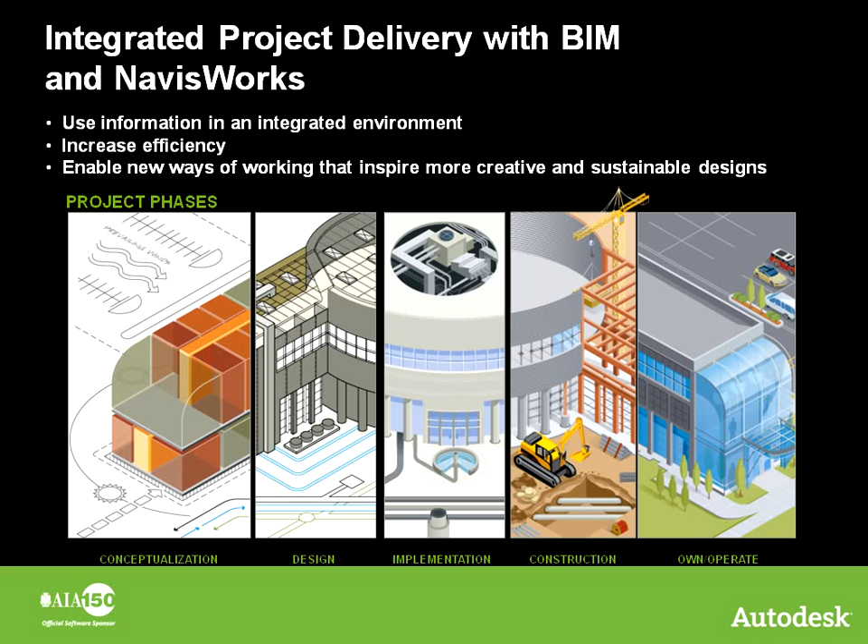What we have now is an integrated project delivery system with BIM and Navisworks. We use the information in an integrated environment, which increases our efficiency and enables new ways of working that inspires more creative and sustainable designs. So we can work on a project at any time in the project. We can create Navisworks models.

Some of the features of Navisworks include a real 3D real-time engine, so we're working as we're moving around the model in real time. We have file format compatibility, which is beyond what other BIM programs can sustain. Review file output is capable, and it's easy for all to use in Navisworks, which is really satisfying a need in the marketplace right now for an easy-to-use viewing tool of multiple softwares.

Navisworks has been around for a while now. It formerly was called Jetstream over in Europe and the UK. Autodesk purchased Navisworks and took the 6 modules that made up Jetstream. It was module based, and they put it into one package called Manage.

Manage allows you to view multiple file formats, publish, present, timeline, and use clash detection. A lower level of those that don't need that much power, we have Simulate, which includes Roamer and Timeliner. And then finally, for those even further down the chain that really only need to look around at 3D models, we've got Navisworks Review, which just has the ability to move around in Navisworks.

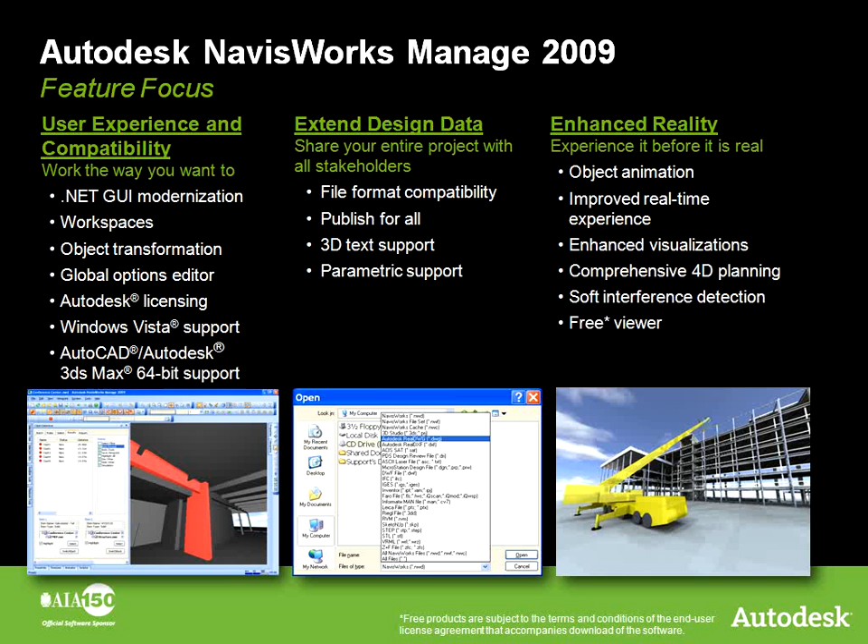We also focused on extending design data and enhanced realities. Here's a list of a few file formats more commonly used in the design industry. You see Navisworks and AutoCAD, MicroStation, a few others listed there. Those are the more common file formats that can be brought into Navisworks and read natively. There's actually a whole other list that's going to pop up in just a second that has more software titles. There's currently over 40 software applications that Autodesk Navisworks can read. And there you see a couple project scheduling, RVM, a number of different formats out there. For those on 64-bit systems, we have 64-bit compatibility in the software.

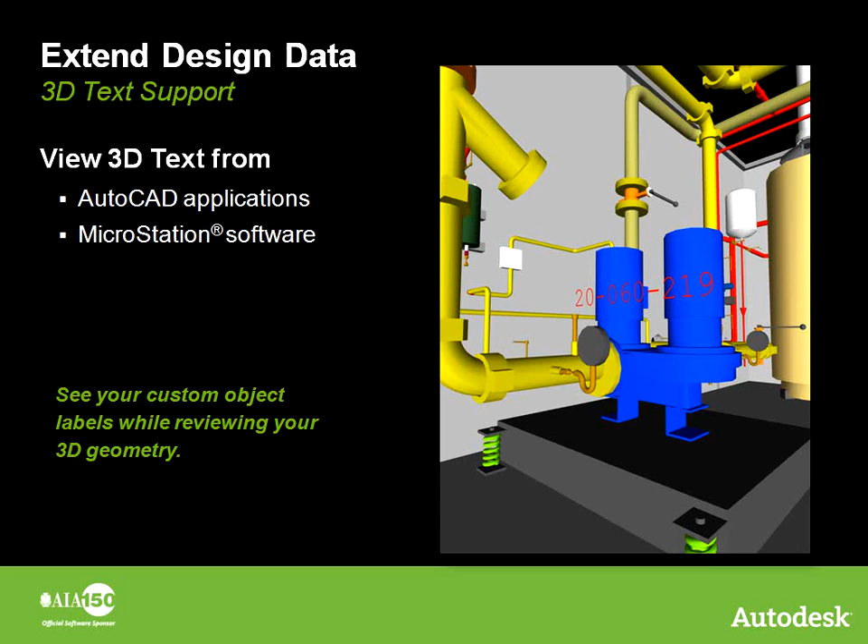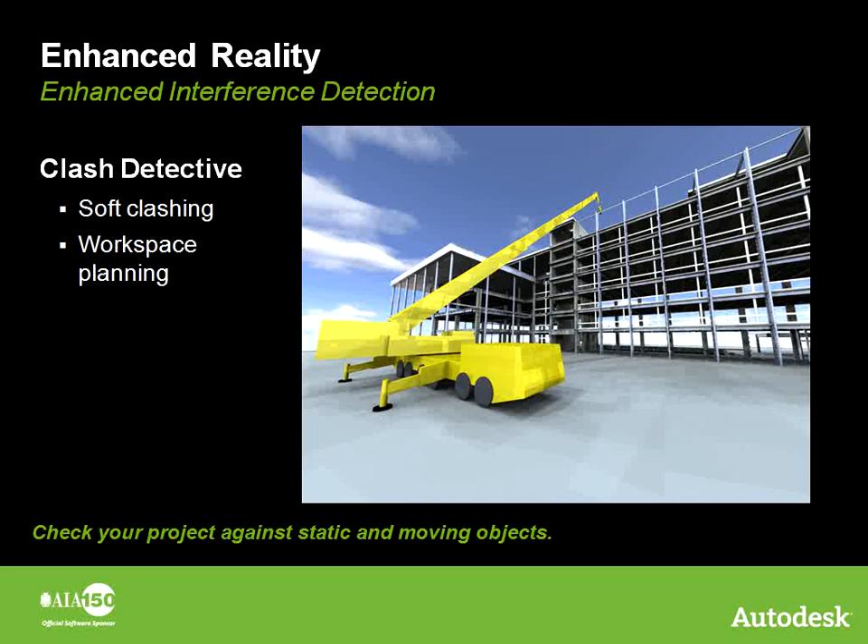Another feature focus was being able to put in 3D text. So if you have text from AutoCAD applications or MicroStation, that can be viewed inside of Navisworks. Also focused on enhanced reality, being able to soft detect or check for clashing on a site. Workspace planning, as you see here, we've got a crane making sure we've got the room.

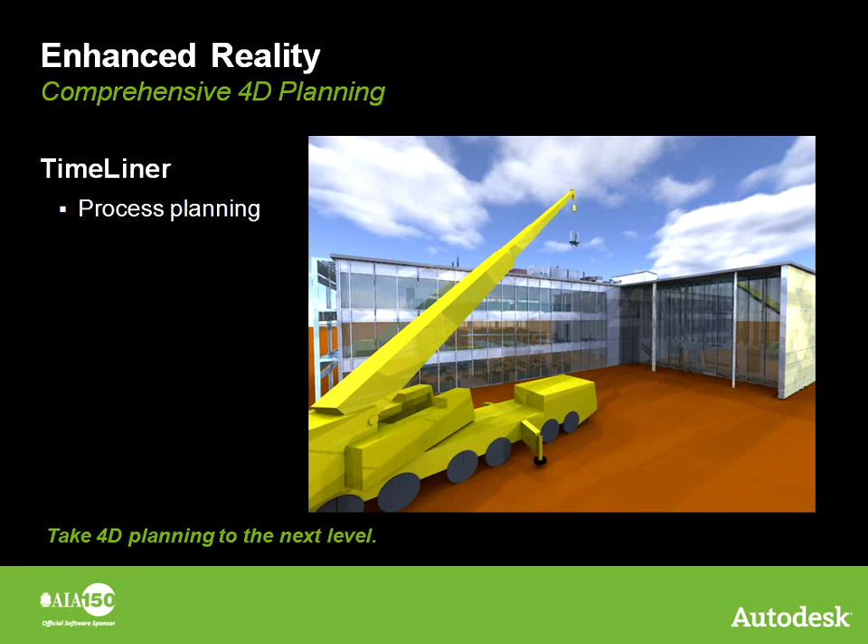Timeliner, a process planning tool, actually adds 4D capability to Navisworks. By scheduling with Microsoft Project or Primavera, we can actually bring that data in and schedule it with objects in our model. Presenter allows us to animate objects. We are bringing in real 3D objects into Navisworks, and here we can create AVI movies and animate specific objects that we want to view.

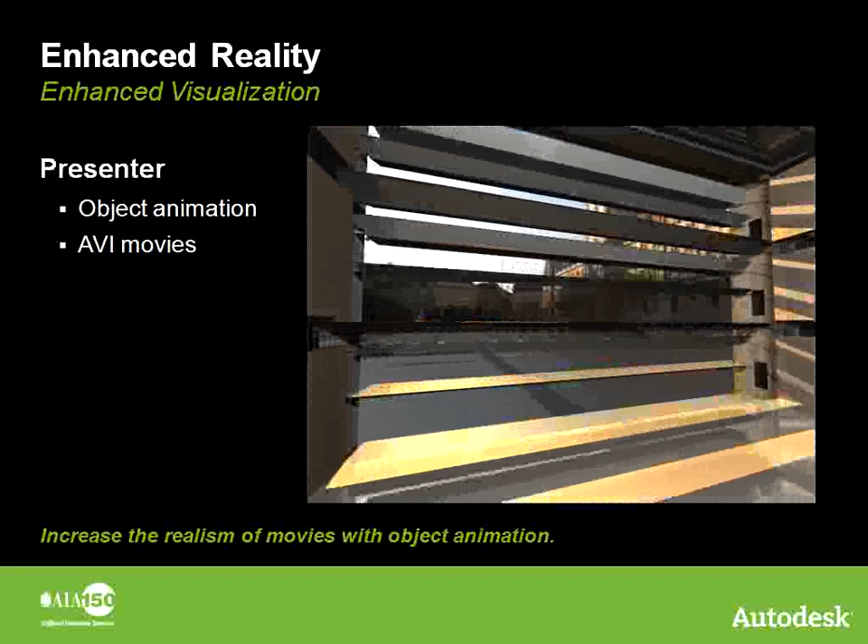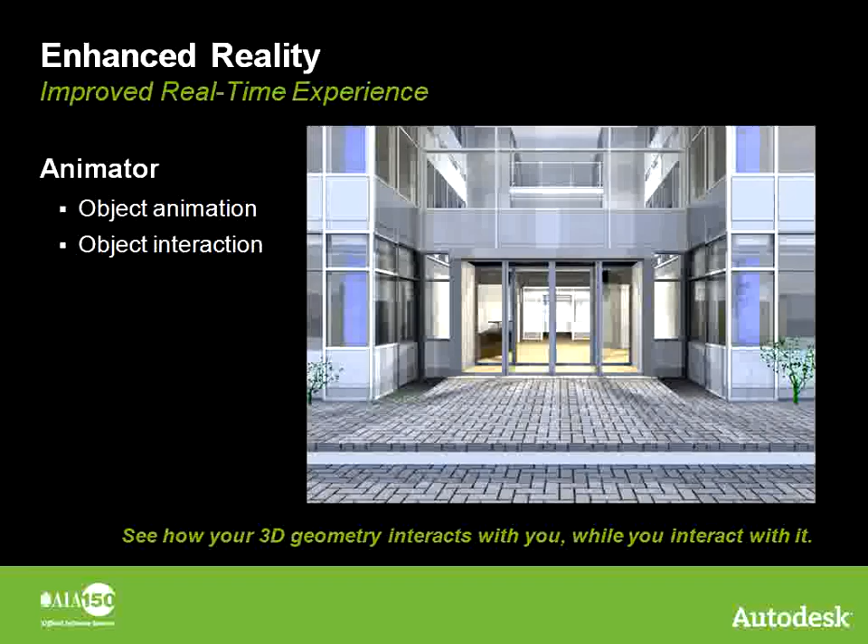Another portion of animation, being able to have things react when we're walking through a building. We can interact with the objects on screen. As we move closer, the doors open. As we move away and turn around, the doors shut as we move through. So it adds that extra realism to our models.

Autodesk also has Navisworks Freedom. Freedom's a free Navisworks and 3D DWF review tool that allows us to play back animations and view specific pieces of the model from Navisworks. This is a free viewer. You can download it right from Autodesk.com.

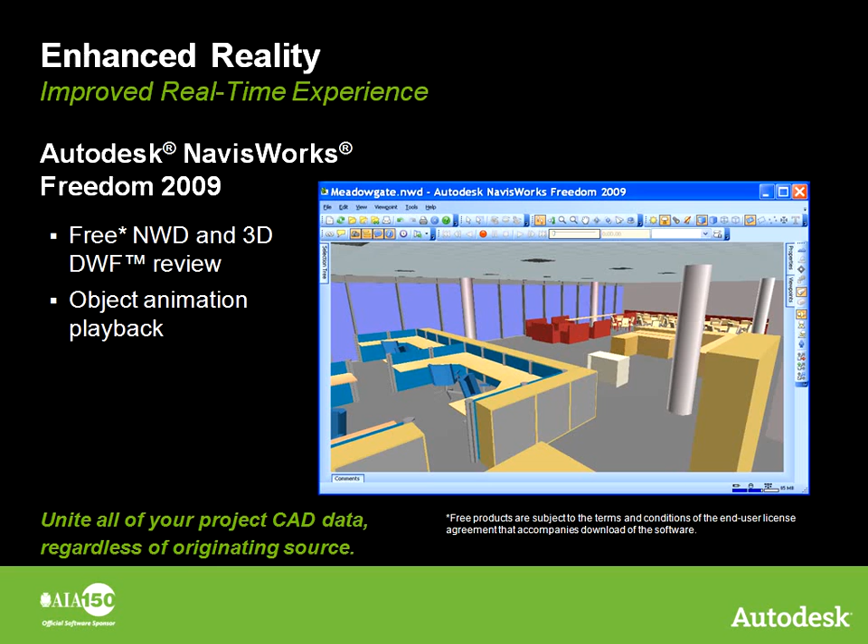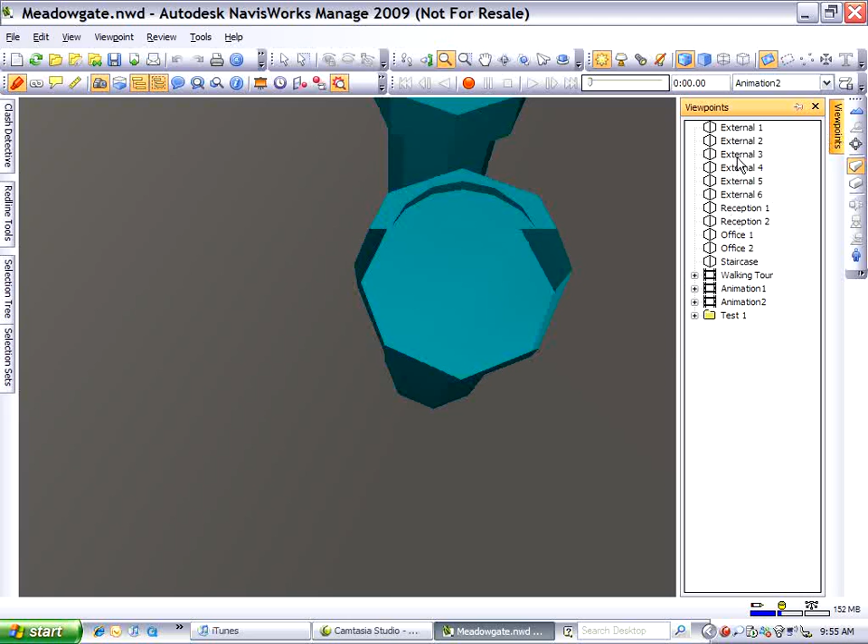Now we're going to take a look at Navisworks in more of a live setting. Here I'm going to start by opening up a couple of files. We're going to start by opening up the Meadowgate project, which is pretty much made up of a number of different pieces of the building.

We have a structure that is done in MicroStation. We have the site plan, which is done in 3D DWF and 3D Studio Max. We have the architecture done in AutoCAD, and we've got the furniture inside done in Max as well. So a number of different file formats are being used here in the drawing.

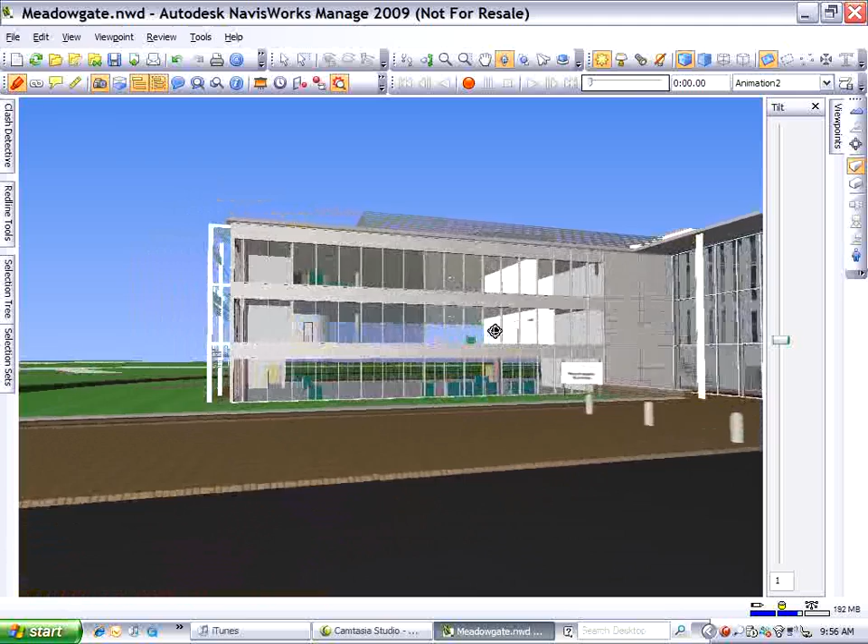We have some really simple navigation tools right up here at the top for moving and navigating around these 3D models. Here I'm using an orbit tool to spin around the model. Any direction that I push or pull moves the model around, allowing me to view it 360 degrees. There are other tools for zooming, so I can create little zoom windows or use a real-time forward and backwards approach to zoom in and out of my models.

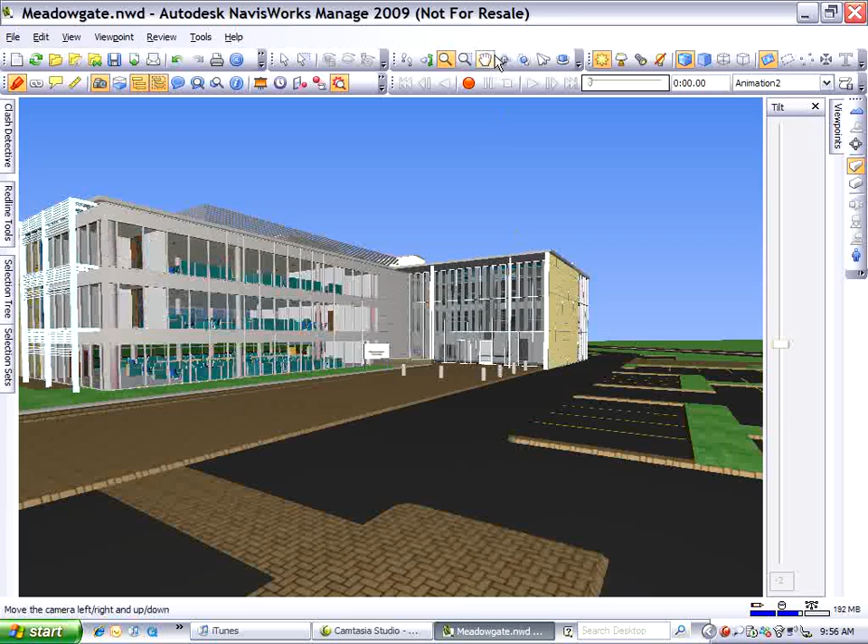Now I'm using a panning tool, so I can pan around the model at the same time, again showing how easy it is to go above or below a 3D model inside of Autodesk.

Viewpoints also give me the option of saving different spots when I find a certain piece of the model I want to view again. I'm going to pin this open and create a very simple animation.

I'm going to start by setting up just saving snapshots or views of the drawing. Here I'm saving a shot of the end of the sidewalk near my project. I'm going to give this a name, and then use the zoom tools and zoom in where I want to finish my model, ending up pretty close into my building.

Navisworks will allow me to interpolate, based on these two snapshots, how the camera is going to get from point A to point B. I don't have to do all the math, I don't have to move the camera myself. Navisworks does that work for me.

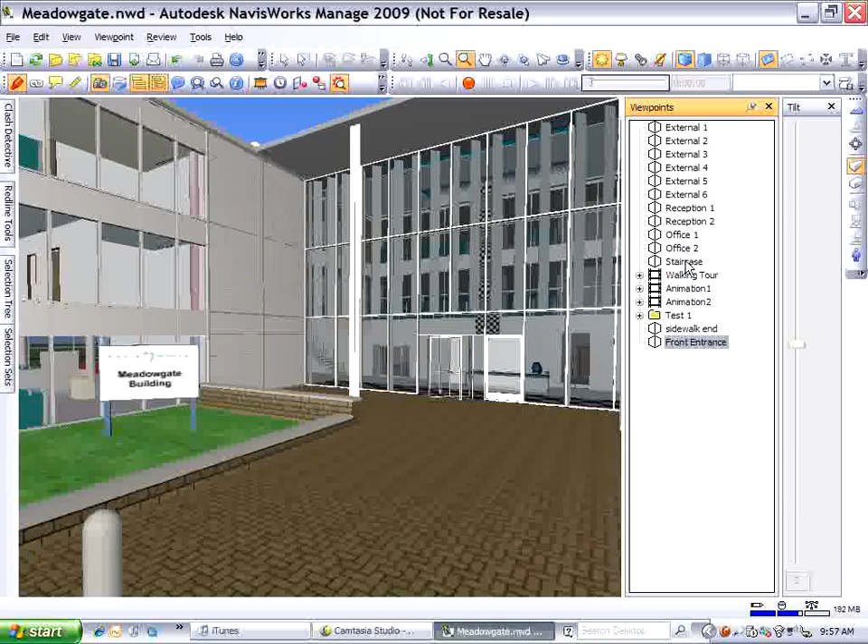So I've got a couple of others, as you can see here, saved. Here's a couple of office views, a lobby view, a couple of exterior views. These are all just single set shots.

But I can take any number of set shots and make an animation. So here I'm just going to right mouse click, and drag and drop these two views, or snapshots if you will, into this animation. So now I've got an animation.

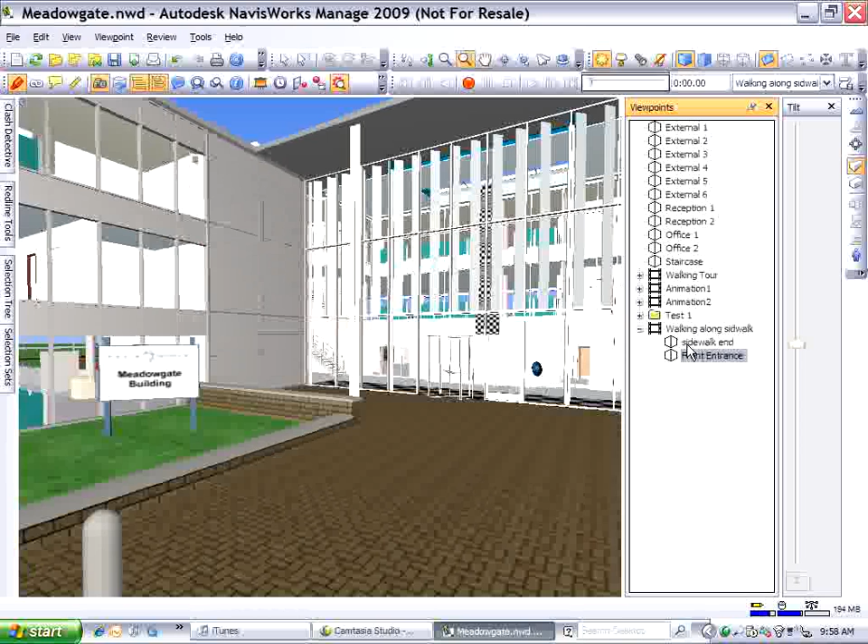I'm going to go ahead and rename this 'walking along the sidewalk,' and drag these two views in. Then, using the controls at the top of the screen, I'm going to simply hit the play button.

Although I should first check, before I hit play, how long my animation is going to be. In this case, I'll go ahead and let it play. And that's going a bit slow.

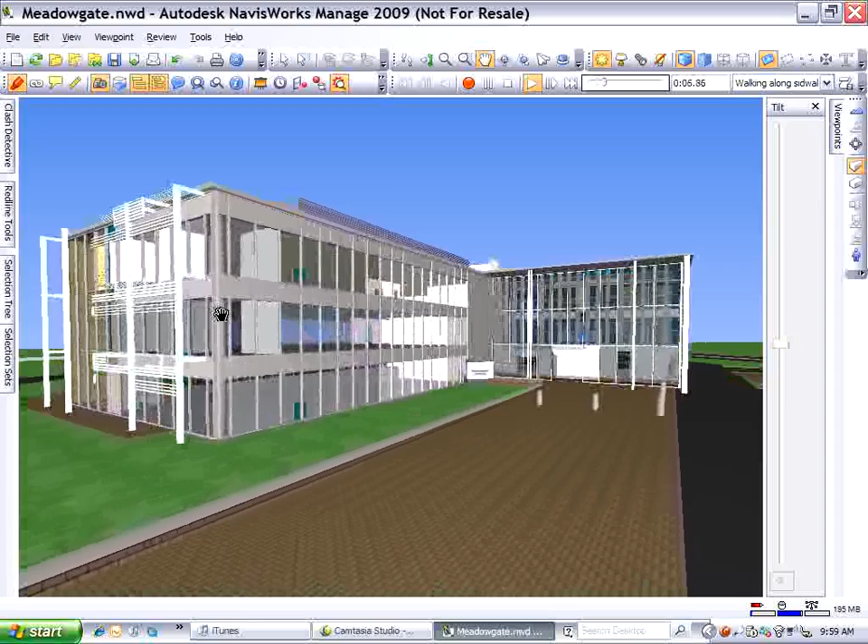Don't want to bore people when we're creating these animations, so I'm going to go in and adjust this. I'll right click on the animation, click on edit, and yep, I've got about a 34-second video. I'm going to drop this down to about 15 seconds and then hit play.

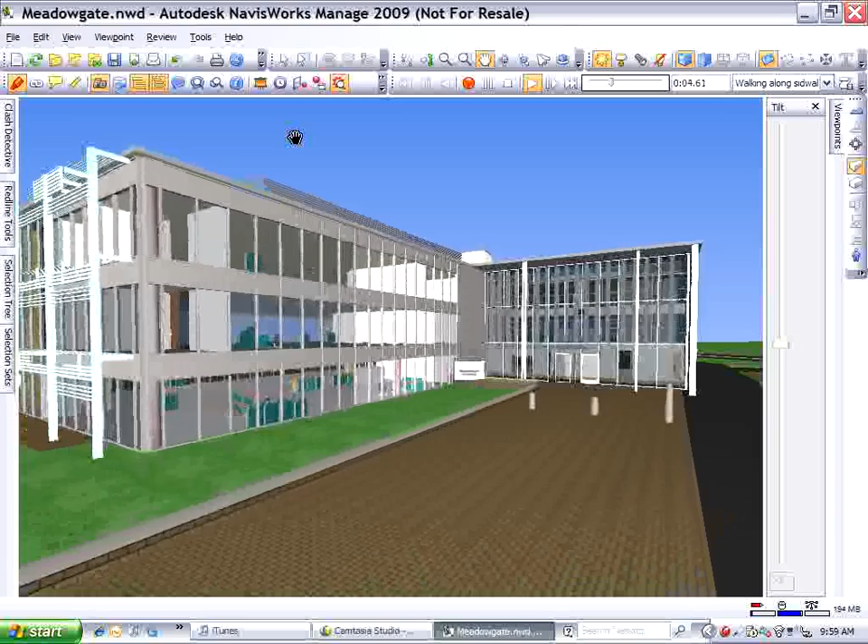So now I'm moving a little bit quicker, a little faster, probably a little more realistic if I was walking along this path. And I've got my finished animation.

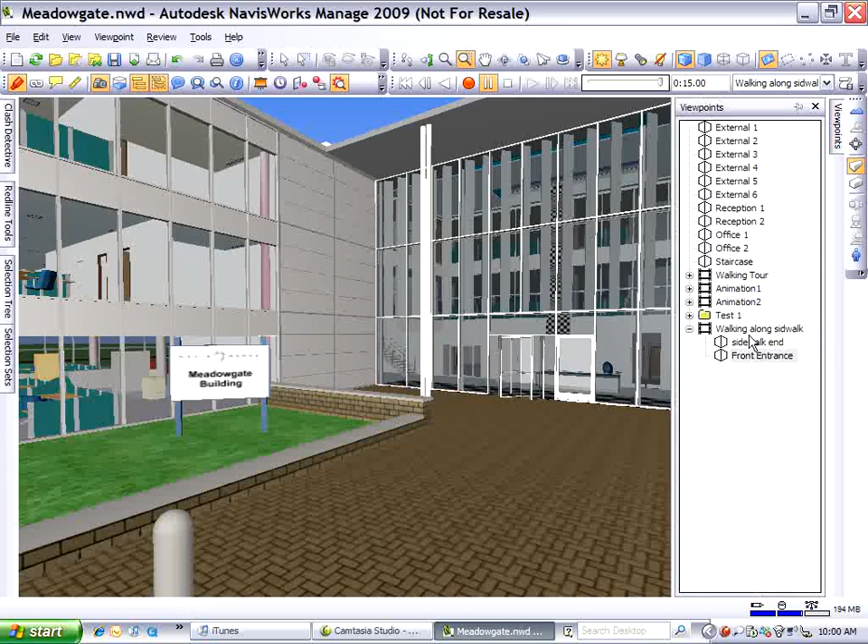Now we can also create animations on the fly. If I wanted to create a different animation, I can start with a different camera view angle, whichever the angle may be.

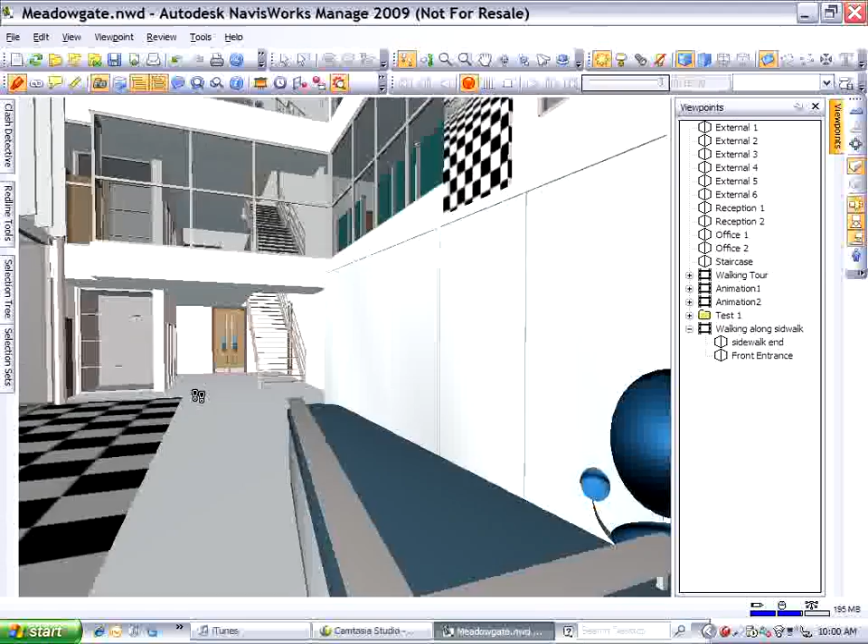We'll go from the reception booth here, and I'm just going to hit the record button at the top of the screen. The record button then allows me to use some simple animation walkthrough tools on the right side of my screen. I'm going to turn on the walk button, and then turn on gravity. Gravity will allow me to simply move to the ground and move around my model. Now as I'm moving through, I'm just pushing the mouse forward or backwards to slow it down. The faster I push forward, as you saw there by the reception desk, the faster I will move.

Here I'm going to pause just a moment and cut through the office and end up out by the main office area of this building. Again, just kind of pushing my mouse forward to get to the location where I want. When I'm done, I hit finish. My viewpoint palette will allow me then to see that animation.

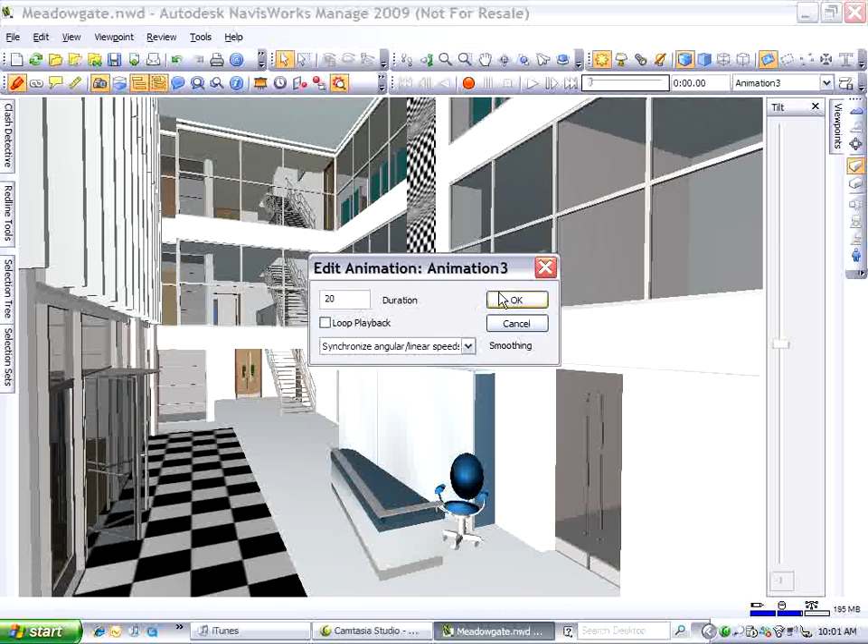Again, right click, and I'm going to edit my animation. Slow that down a little bit. Yeah, I got 45, almost 45 seconds, so we're going to change it to 20. And we'll hit play again.

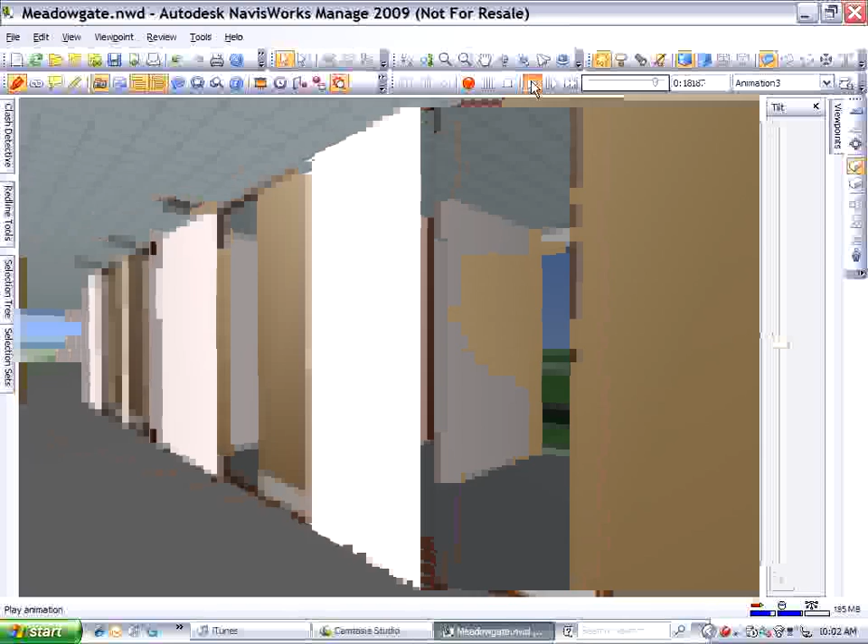And you can see it actually drop down a little quicker, still moving a little bit quicker. We might want to lengthen that or cut that up into different pieces as we're animating the building and jockeying around. Because again, the point isn't to—the point is to show off the modeling capabilities inside of here.

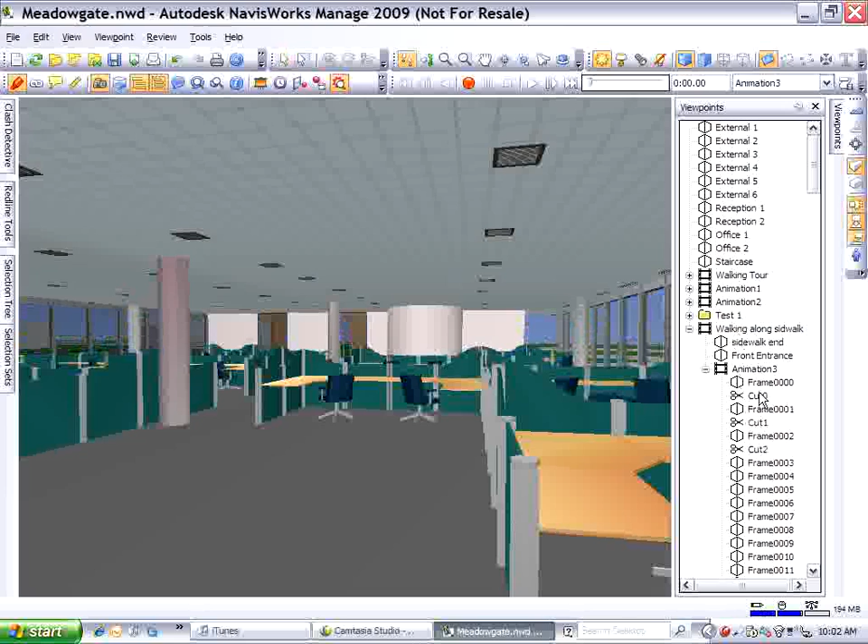Now I'm going to take that animation I just created manually, and I'm going to go ahead and edit this again, change it to 30 seconds, try to find that nice, slow, meandering type path. I'm going to take that animation and drop it inside of the other animation that I just created. So I have the outside of the building, and then I've created one inside moving up to the first floor from the ground floor. And I'll go ahead and play this animation.

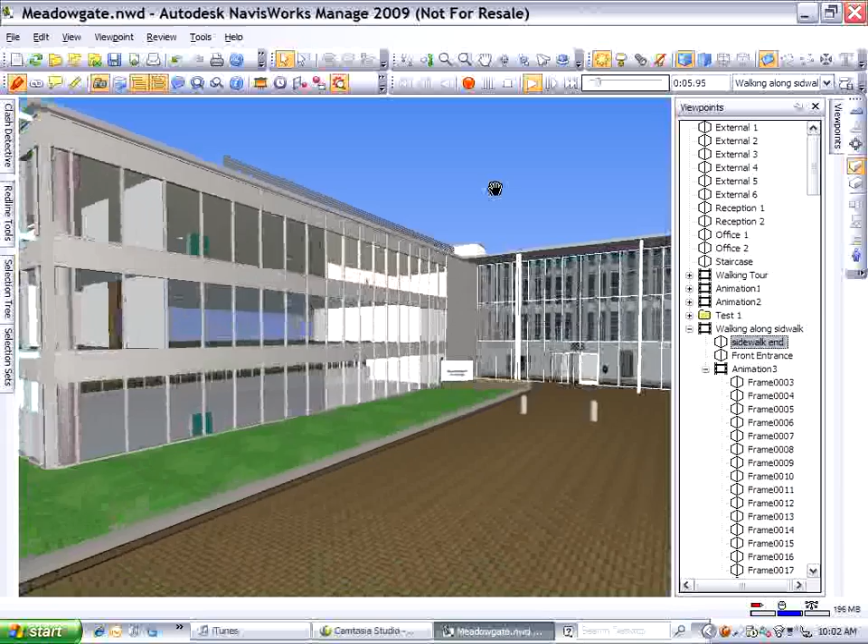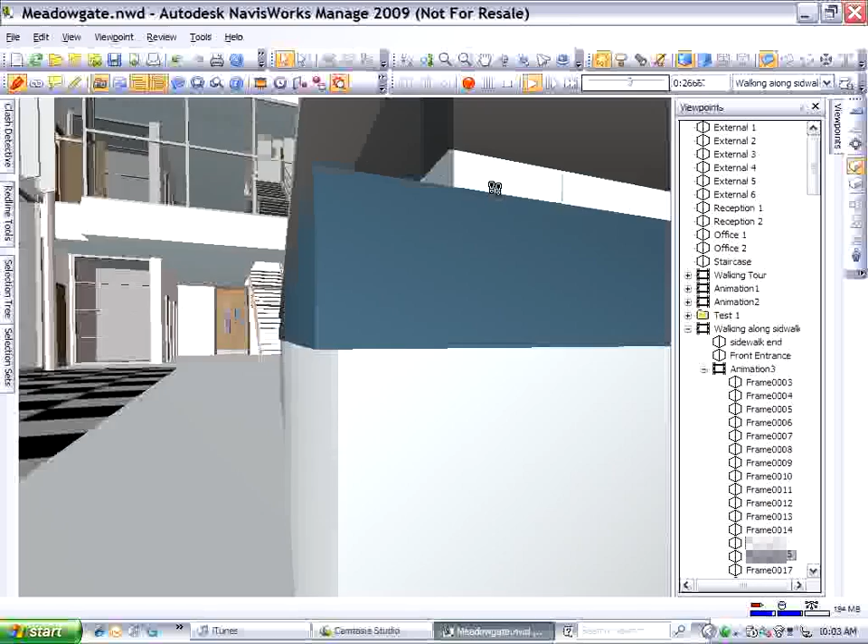So here you can see the animation that was created with just viewpoints, just a couple of image snapshots or pictures. Once it gets into my building, or near the building, then it's going to switch over, and you can actually see the viewpoints on the side of where frame we're on and where we're at. Now it's cutting through the building, running into the reception area, and now it's going through all of the scenes that it needs to go up the stairs, pausing inside of the building.

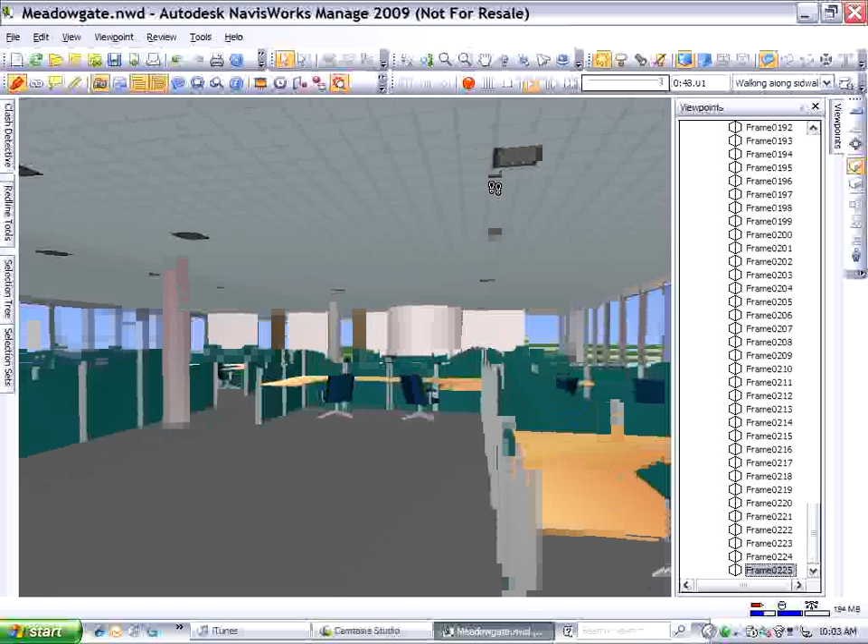There's also tools in here called collision, which allow you to bump into things but not run through them. So with the reception desk, we did not run through the reception desk. We actually bounced right off of the reception desk. So there's tools like that as well, or you can turn them off and allow yourselves to go in.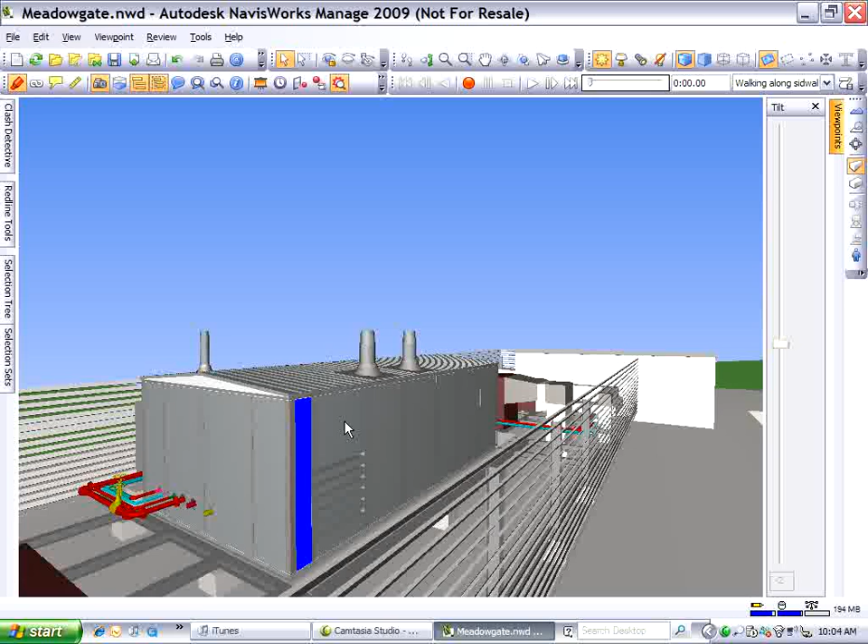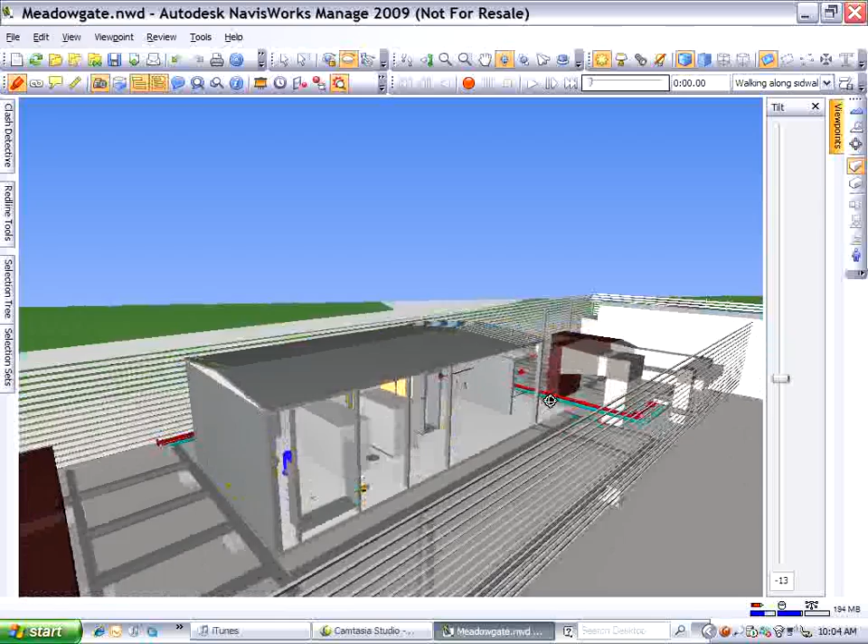I'm going to grab some items in here, and I'm just going to right-click and hide these things so I can look through my building. So now I've turned them off, I can see inside of my mechanical room. And again, I'm going to adjust this to get the best view possible of the inner workings of the mechanical system on this roof.

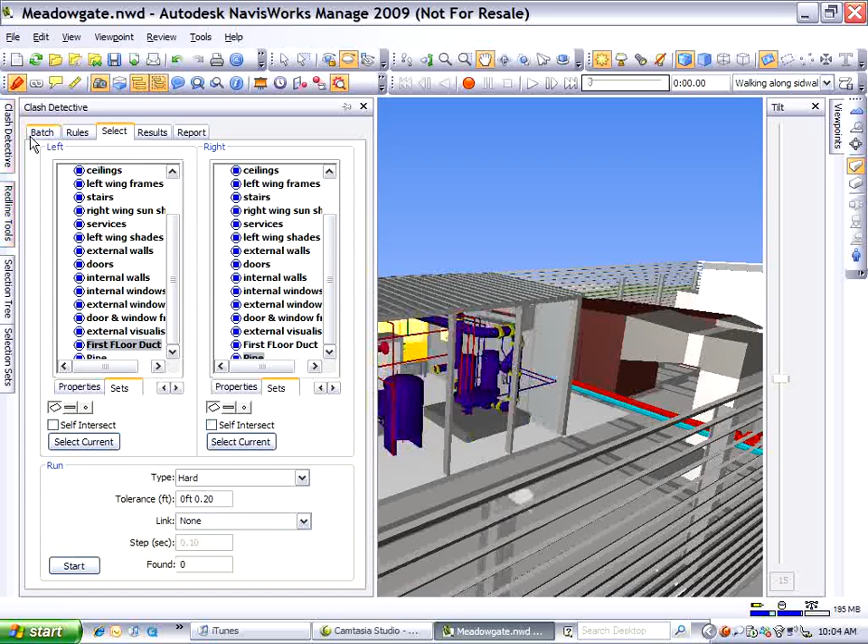I'm going to open up a palette called Redline. Redline allows me to add notes, add color, add line work, add various pieces to my model, and save these, and collaborate with others on the project team.

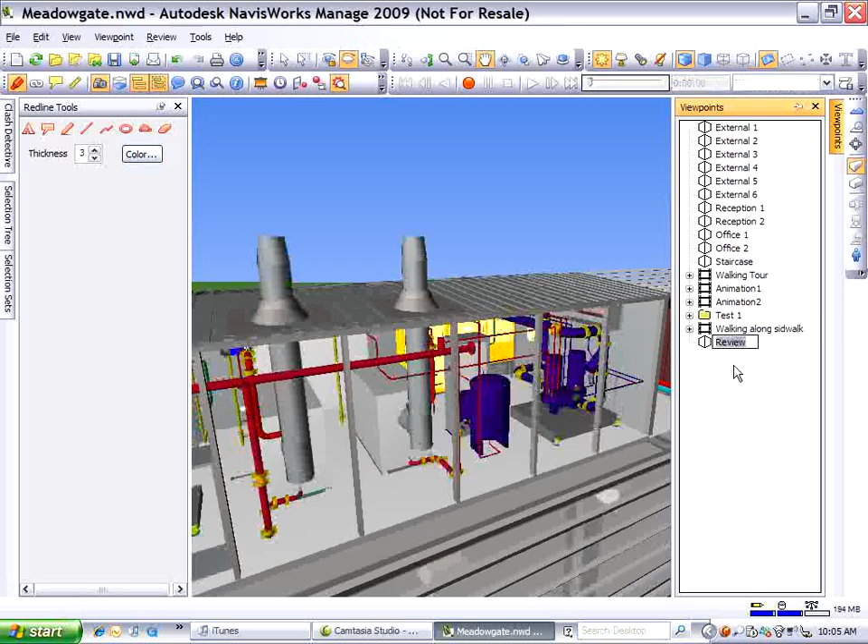Here I'm going to draw with some simple tools. I'll draw a circle around the object I want to reference for my MEP guys, and then save this snapshot. I can quickly save it out as a JPEG image and send it off to the MEP guys with the corrections or items I want to clarify.

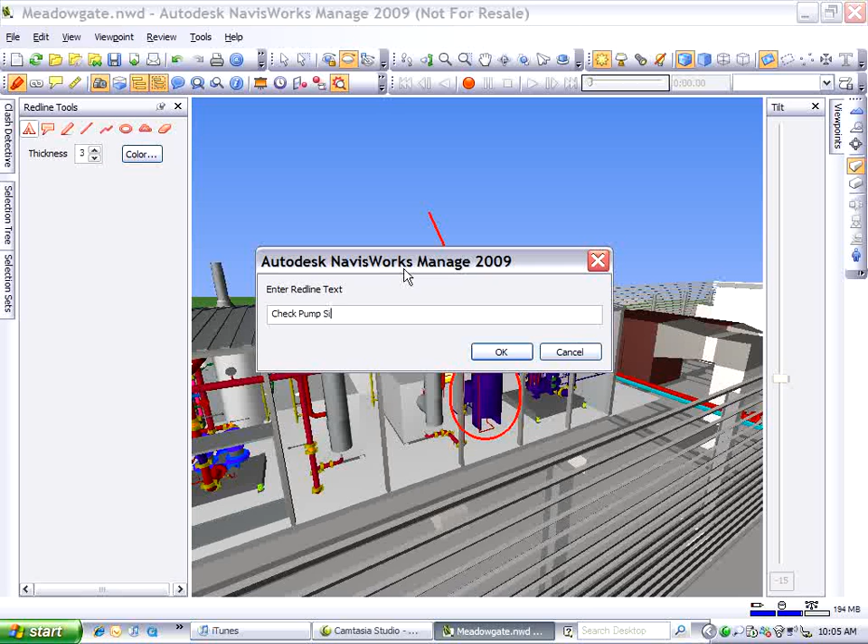Here I'm drawing a circle around a pump. I'm going to draw a couple lines pointing to it, and then put in a piece of text, just to reference them, having them check the pump size and see if that's going to work for the building.

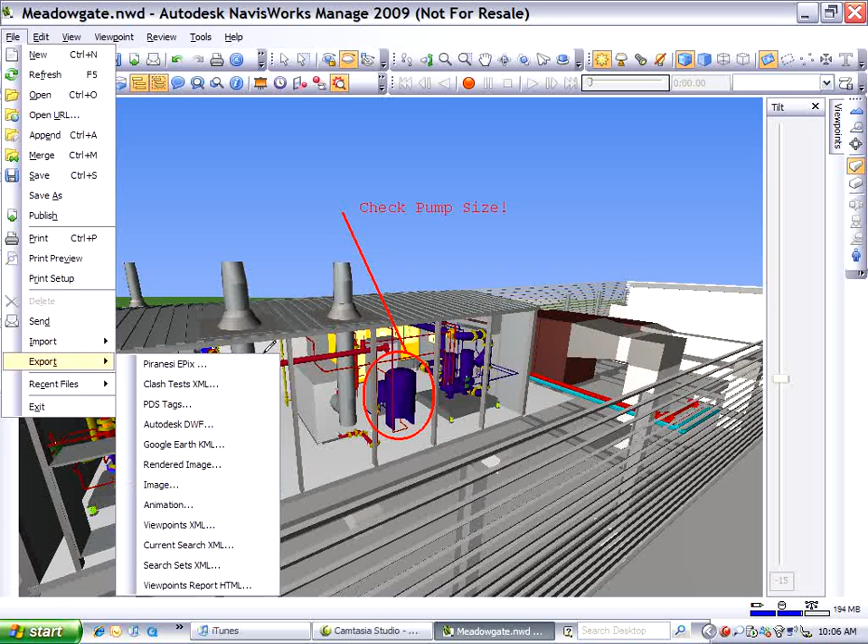With that in there, that stays with the view now. Anytime I come back to the view, that's there. Or I can export it out as an image file and save it for the MEP guys. They can look at it and give me a call back saying, yep, that works via the specifications that we have.

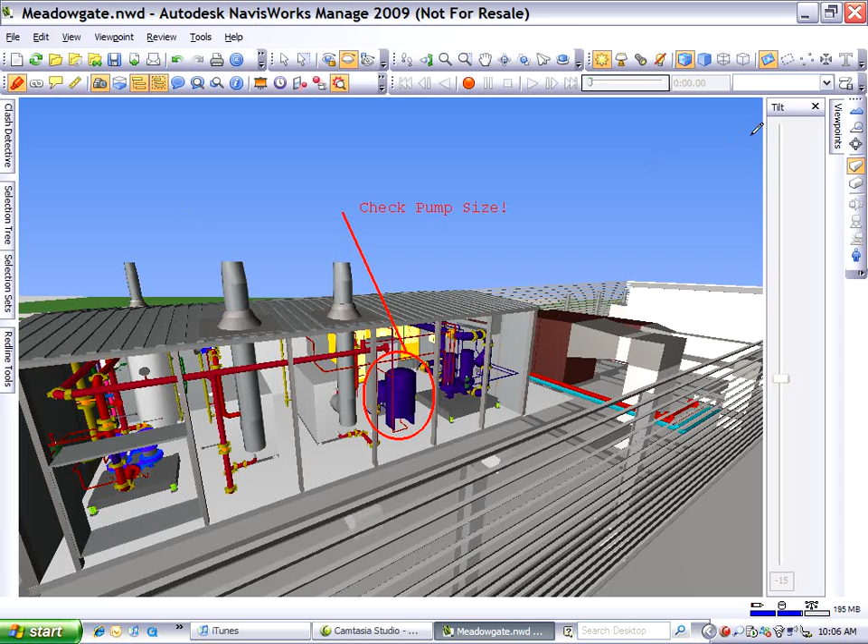So, very easy to collaborate with others with Navisworks, view models, view objects in the building or around the building, and just generally move or navigate inside of the building.

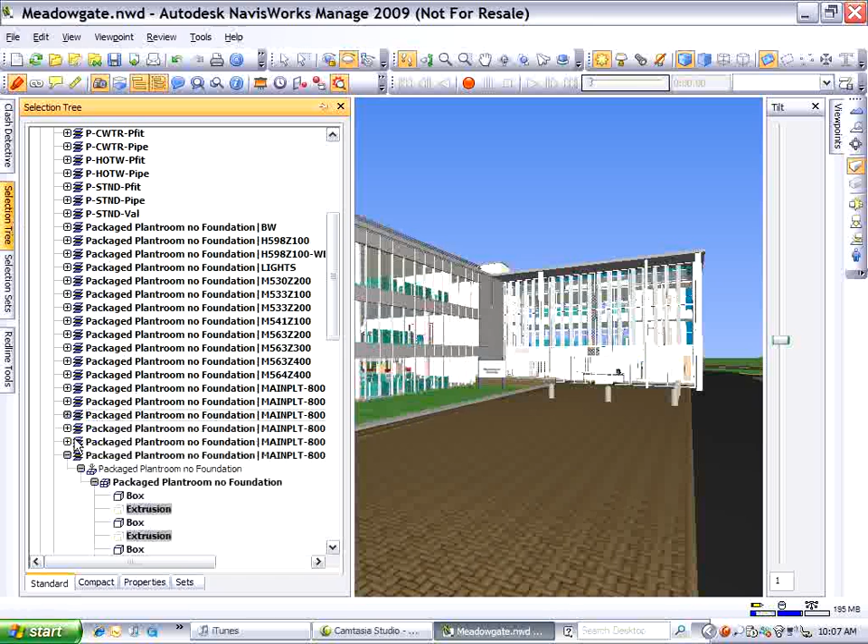There's also tools in here for selecting certain items. Here you can see all of the files that make up this particular model. We've got the building as a DWG, furniture DWGs, a site plan that's a Navisworks file, and visualization objects from 3D Studio Max. All of these things make up this building from various vendors and clients.

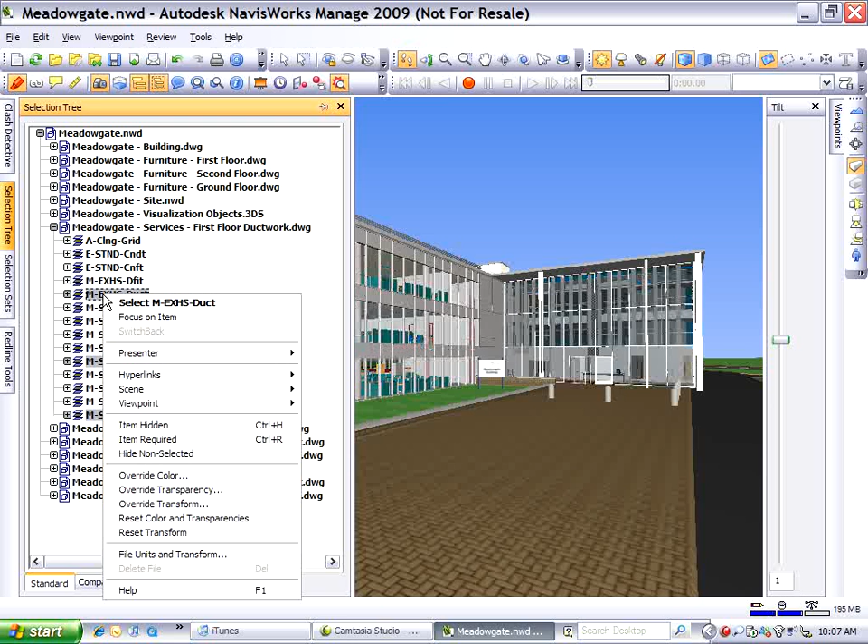By them giving us a 3D model, we can then go through and select certain items. Here I'm selecting all the ductwork on the first floor plan, and I'm going to create a selection set of just the ductwork on the first floor.

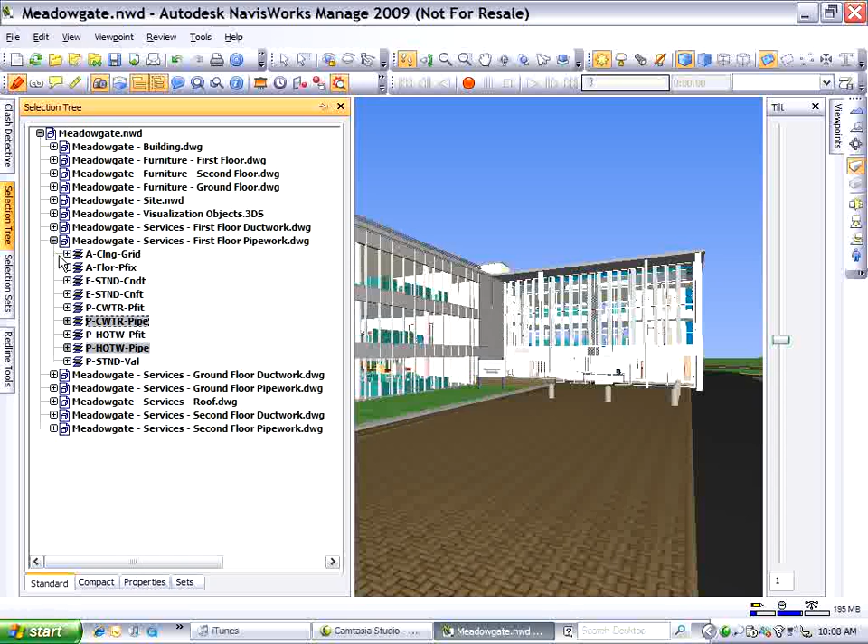I'll go ahead and delete the old one, and I'm going to do the same thing for the pipes. So I'm going to delete the existing one that I had saved in here, and go to the pipework drawing and select just the pipes in the drawing. Back to selection sets.

Now I can use these selection sets later down the line for other things in the drawing. And in this case, what I'm going to use this for is clash detection.

Here's a different way to also search for items. If you don't want to use the selection tree, there is a find items palette that pops up from the bottom that allows me to go through and pick different categories and pick different items to select.

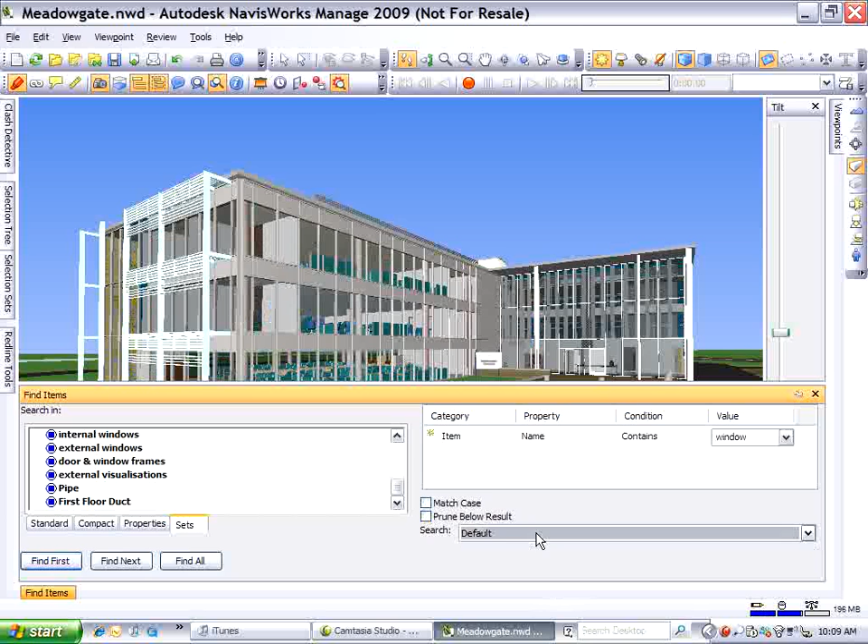Here I'm looking at all the items in the drawing with a specific name, and in this case I'm selecting all the windows. Anything that says window is going to be selected, and you can see those in blue in the model. So again, it's a 3D real-time engine.

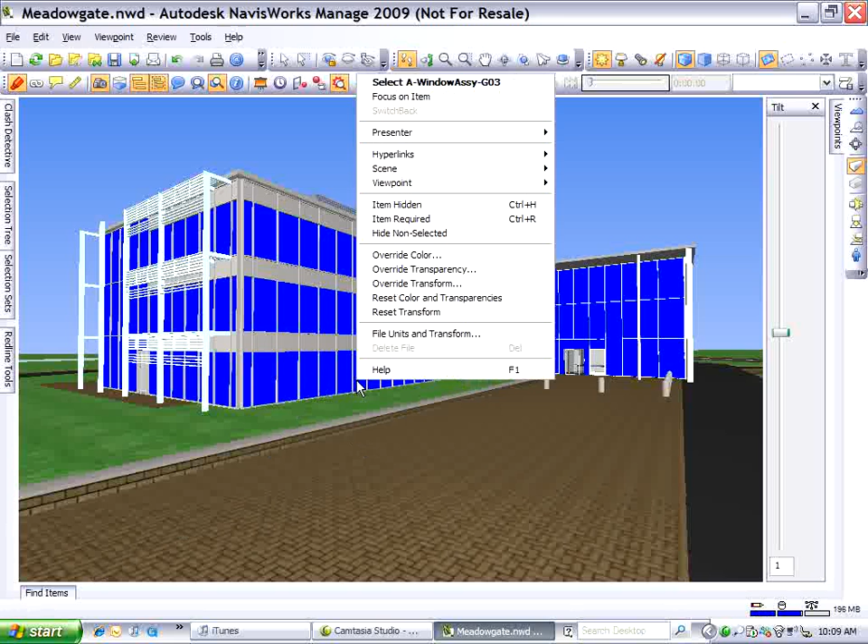As I pick something or select something, I can change that. Here I'm changing the opacity of all the windows, or I can go through and change the color of something in the drawing. So all the windows could be grayed, transparent, or see-through.

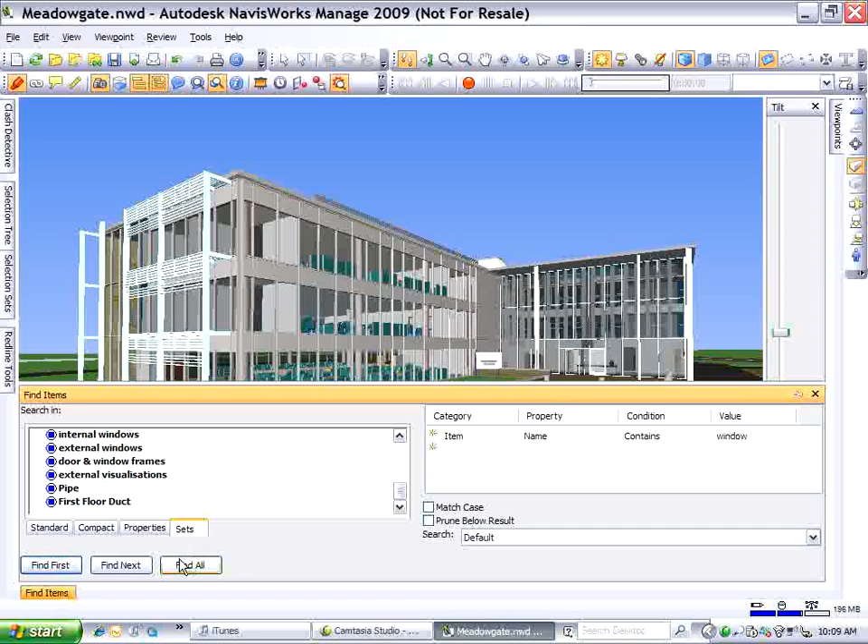So there's a number of ways that we can pick items. In this case, I've just set up a filter to select all the windows, so I don't have to pick every individual window separately. I can pick multiples. So again, I've got pipe and I've got the ducts pre-set up.

Now we're going to use the clash detective. Clash detective allows me to pick two items and see if they clash with each other. We can either pick a clash that is what they call a hard clash, meaning two things that connect or touch or run into each other, or we can do things like soft clashing, like checking for clearances.

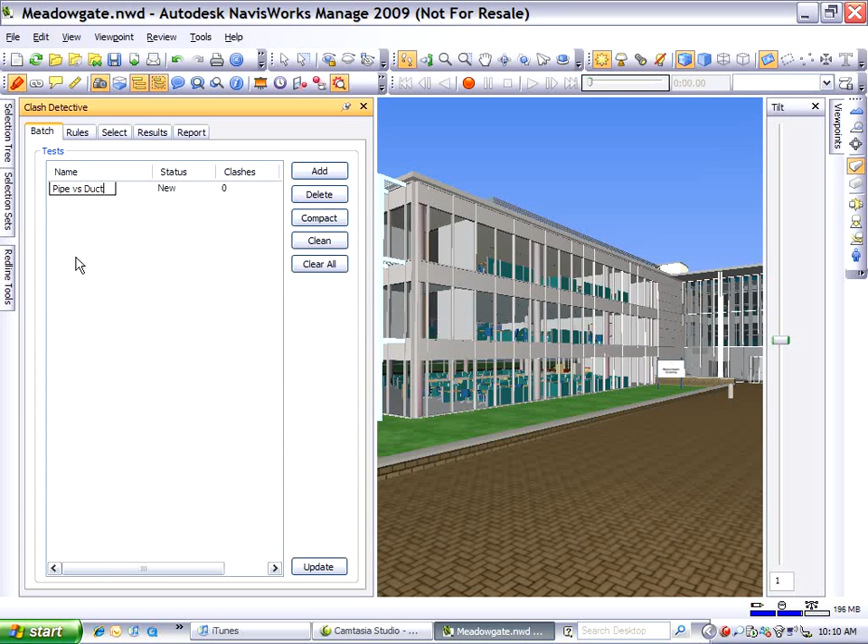A pipe may need a certain clearance to be able to access it. So we can go through and make sure that certain pipes, structure elements, or pretty much anything in our models won't touch, or make sure that they have the clearance they need for the building. Again, this is important because we're doing this before the ground's broken yet. We're finishing this, checking this out ahead of time.

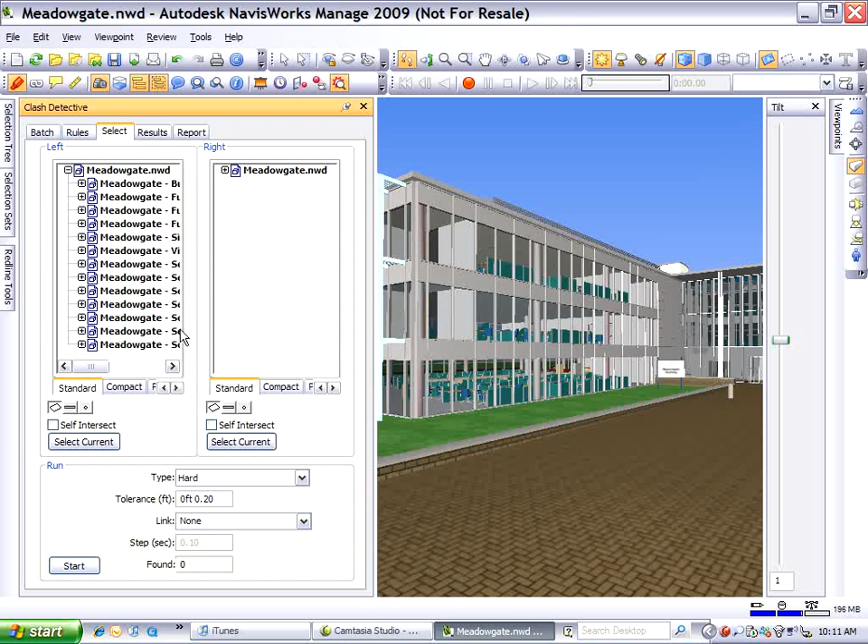Now I've got the select tab selected in Clash Detective. So we're going to go through and pick the first floor ducts on the left side, and the pipes on the right. Again, being able to check for clearances, hard, or if I want a clearance, a soft detection.

In this case, we want a hard detection. So we're going to go through hard detection, and we should see at the bottom of this list how many it's found when I hit start.

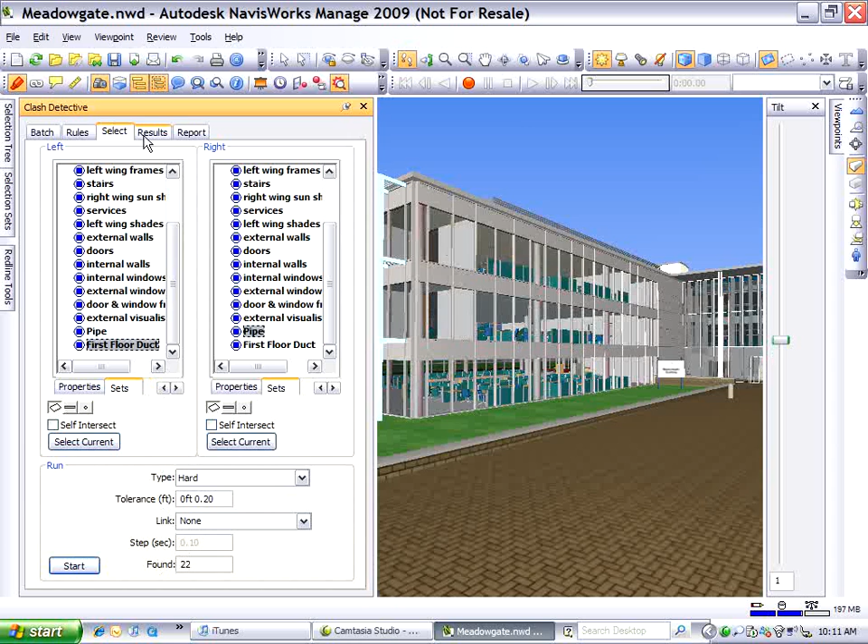Here in my model, it found 22 issues with this particular drawing. I can go to the Results tab and actually view these. So I can go throughout my building.

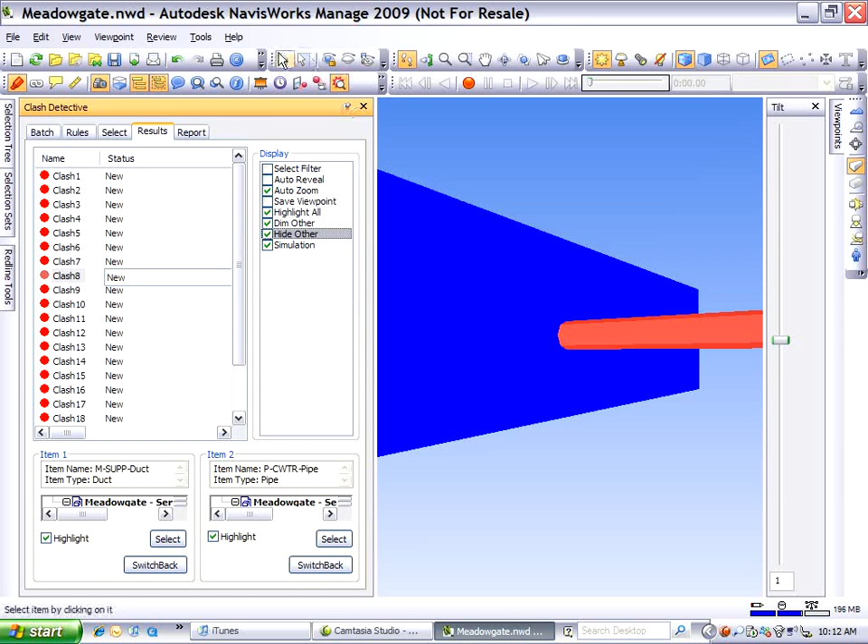I've got 22 of these I can go through and see where it's colliding. In most cases, it's the pipes connecting or touching the ductwork. Here I'm going to isolate this so we can see it a little better. I have a pipe running right through a piece of duct.

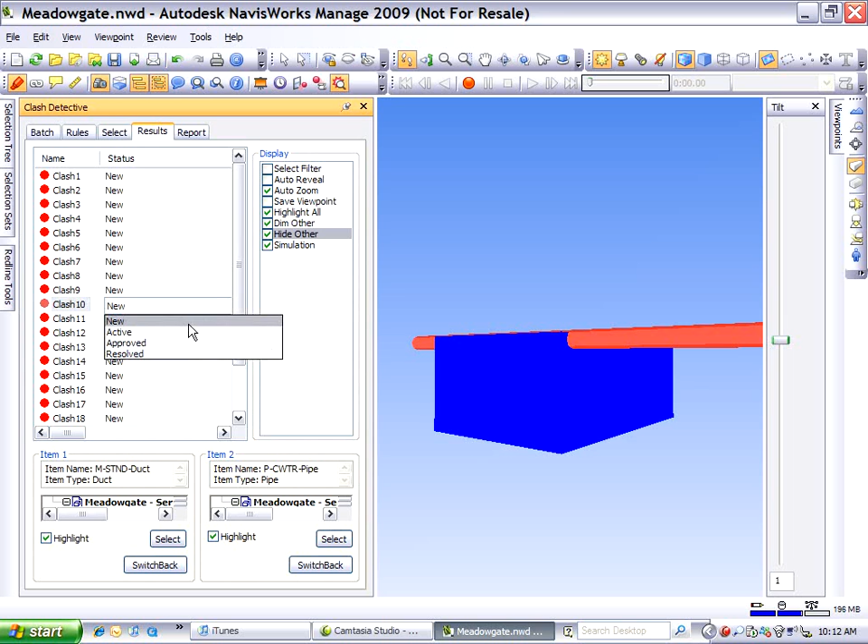Again, some other views with the hidden or hiding other objects. Once I've got the results, I also have the option to make it active, approved, or resolved if we want to resolve it. I'm going to actually create a report right out of Navisworks.

So in my report, I can typically tell it which items I want it to contain. Do I want to see a summary where it's located? Do I want an image with that item? I can also include other collisions.

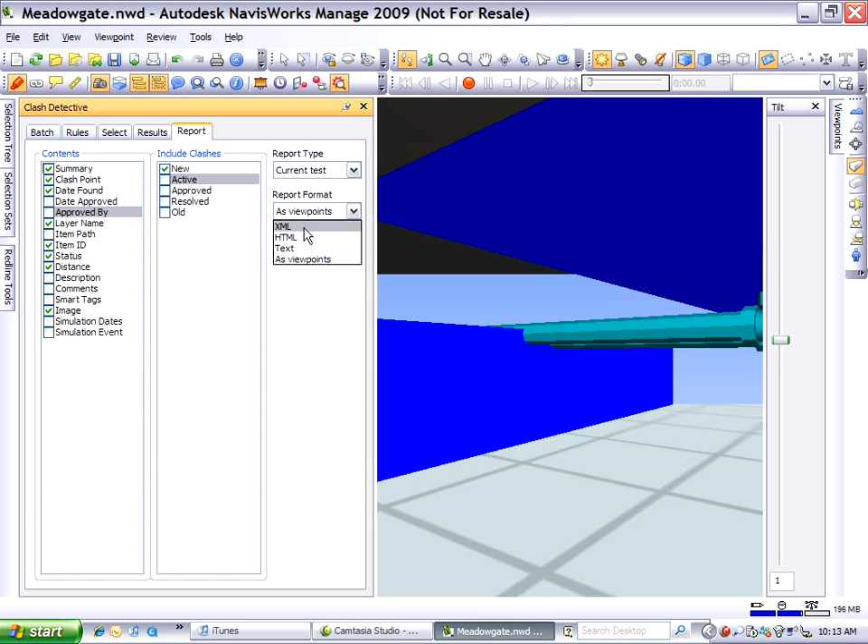Do I want to see all the new collisions, the active? The various report types that we can create - we can create an XML, HTML, text, or we can just create it as viewpoints in the model and send the model to somebody. I'll create an HTML.

And I'm going to create a folder for this, so it's a little bit easy. I'm going to have 22 pictures along with an HTML file, so I kind of want to make that show up. Probably wouldn't want to put that on a desktop or in some blank folder because it'd be a little tough to find it.

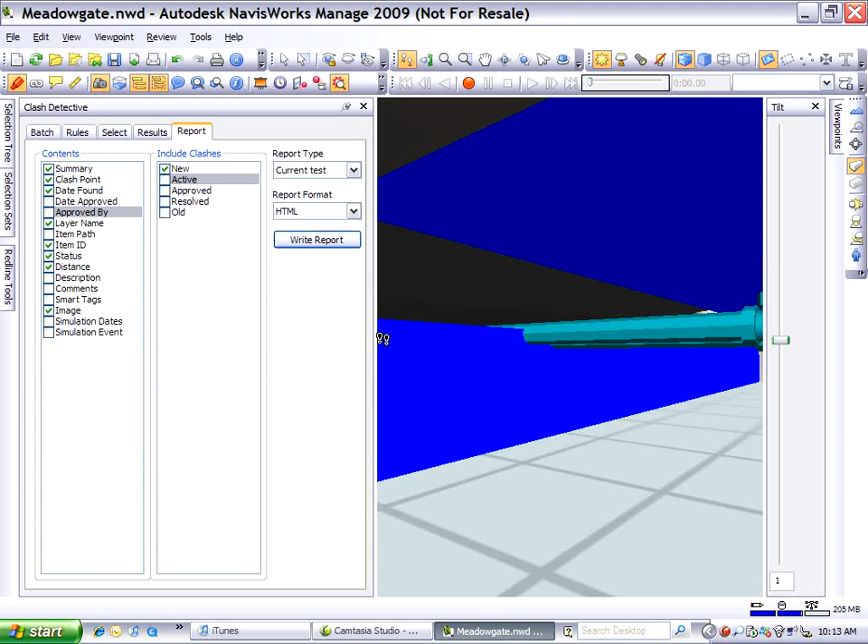So in a matter of seconds now, I've just created an HTML document that has documentation for all 22 clashes, as well as where they're located. And I could go out if I would like and open up that HTML file.

Presenter is another popular feature in Navisworks. Most of the time when we get 3D models, we don't necessarily have materials placed on there. Navisworks has a number of material types that we can put right into our file.

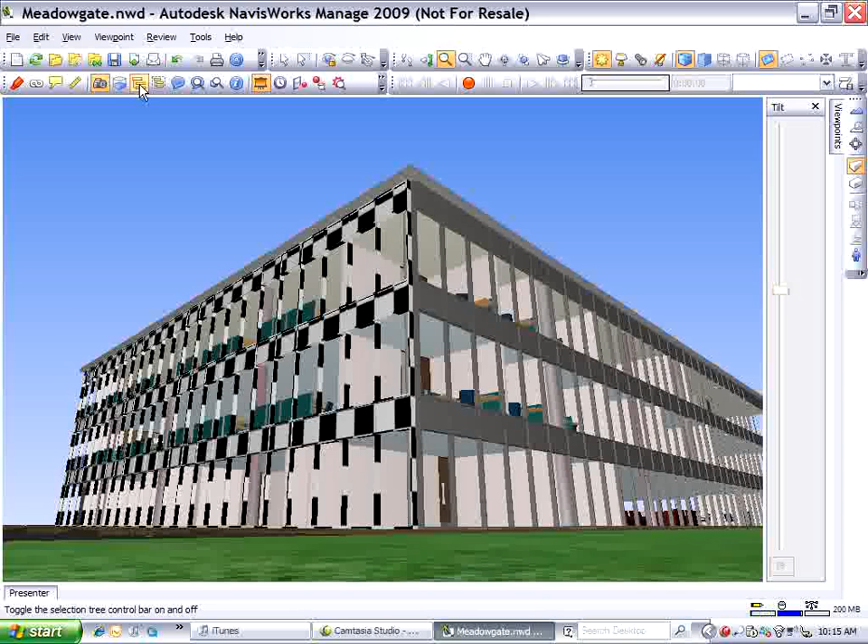I'll go back in and readjust that. I did it quite big. We'll put in a smaller pattern. Probably not quite enough. And again, we'll go through. I can pick from patterns that already exist in the drawing, as this was already created for us.

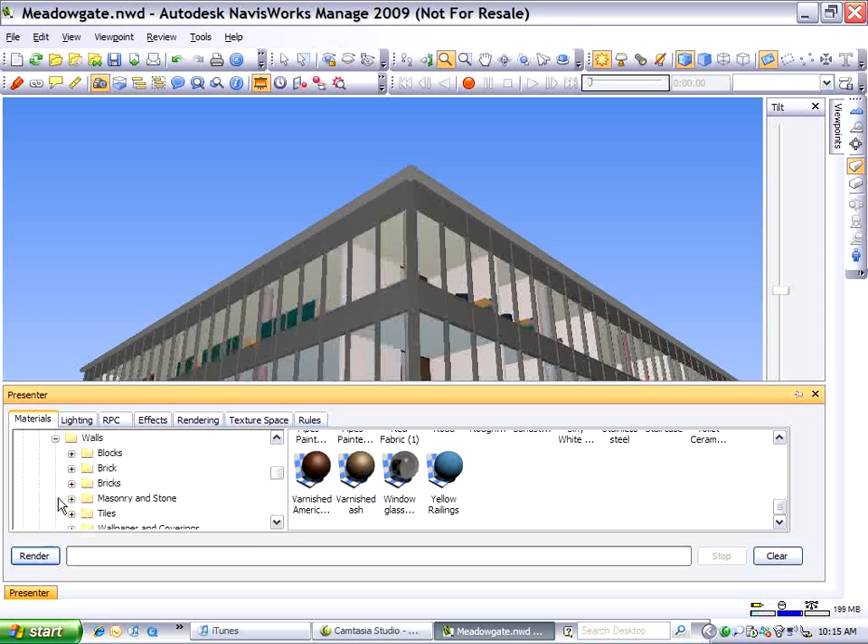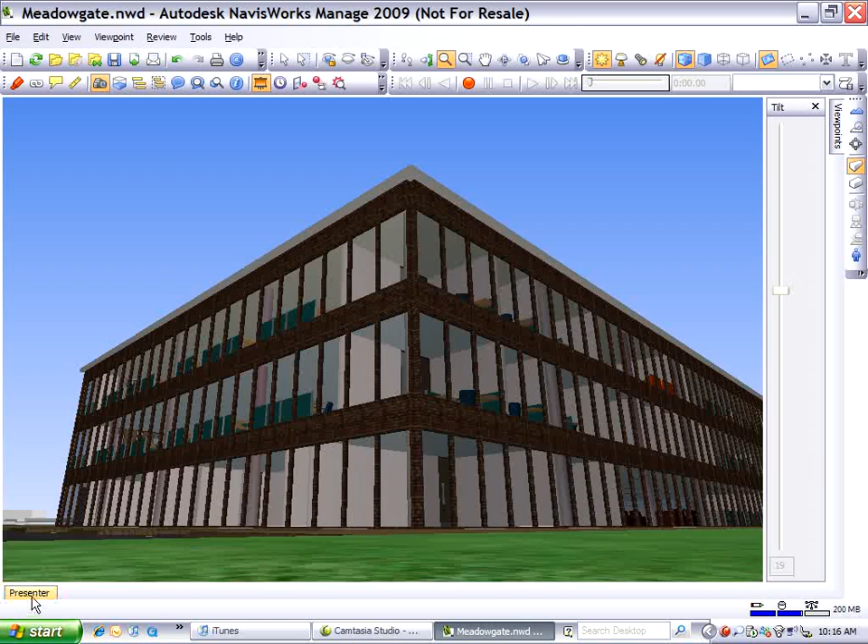Or I can go through and just add in my own types. So we're going to go into the walls, brick, and we're just going to put in a brick material on our walls. So now we've got a brick material with mortar and all of the information that make it look a little realistic.

You'll notice in Presenter also we do have lights we can add, RPC if you want to add real people or cars, different effects, different background effects. Right now we've got a background that's white. It's kind of a fade from blue to white, a gradient.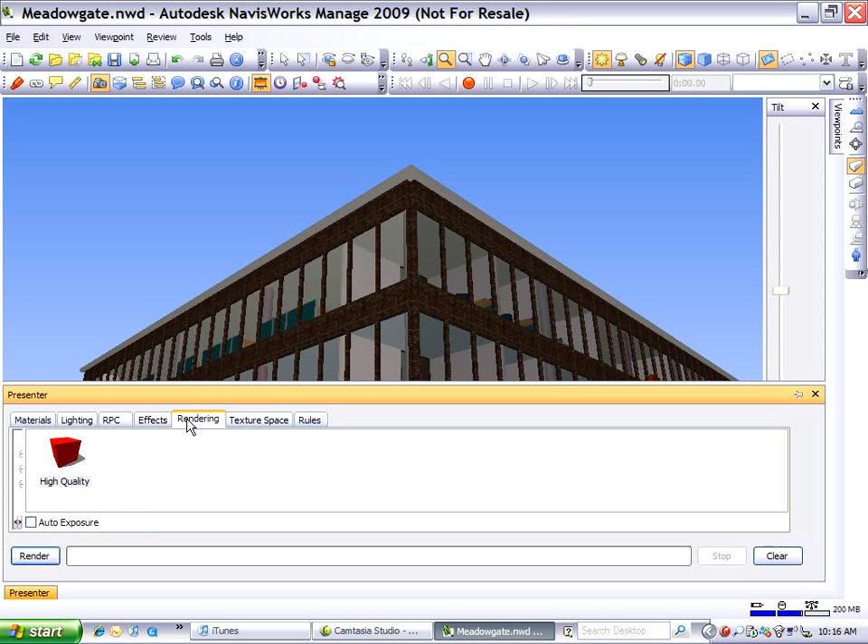But we can add a number - they've got a number of them pre-available. Here's a tree with field, hills, here a hill terrain. We're going to go ahead and bring this in. We can go in and create renderings. I'm going to create a quick rendering of this model.

Most of these tools I'm using right now, you can add them through Revit or AutoCAD Architecture, or most people take it to 3D Studio Max and do all the materials, renderings, and those fun things inside of a rendering tool. Here we're doing it in the same tool that we're viewing, modeling, and checking our designs.

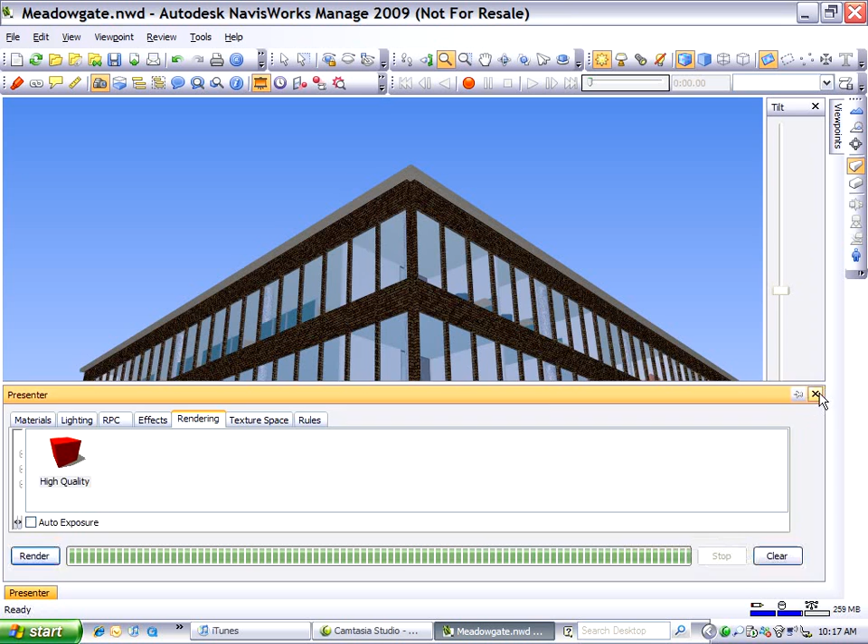It should just be about done, so I'm going to stop this. Here we've got a pretty nice looking rendering. Now I'm going to switch over and open up a different file.

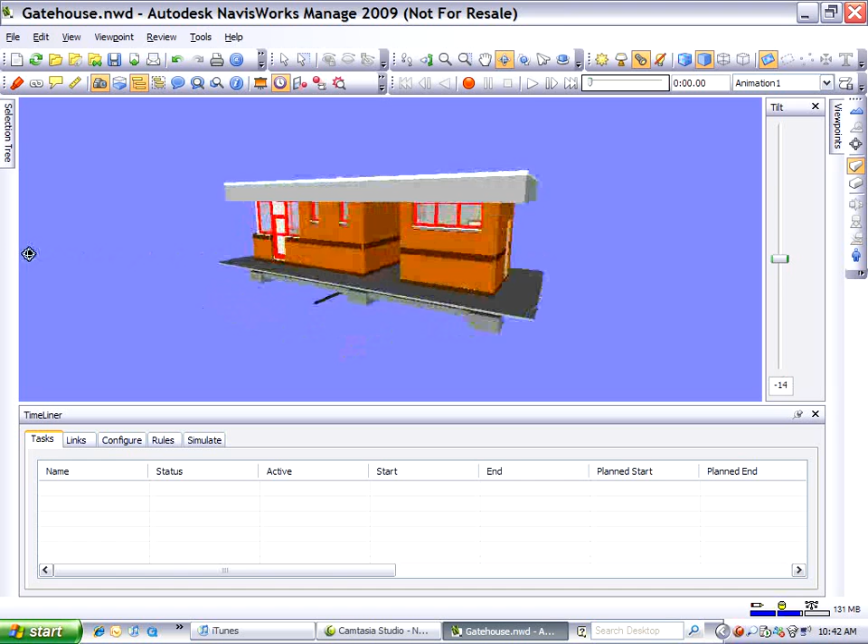This is a gatehouse, a little gatehouse I'm building, and we're going to look at the timeliner feature. I can navigate around the tool and our models and see all the pieces of the model. But what we really want to do is, I have a Microsoft Project set up for basically the sequence of construction for this little gatehouse.

As you see here, I don't have any tasks currently listed. I don't know what the sequence of construction is going to be yet. With the Links tab, I can go ahead and add a link, and I've got the option of Microsoft Project or Primavera Project.

Here's my Microsoft Project with all the tasks and everything outlined. I'm going to bring that in and just add a field selector for when I'm going to start.

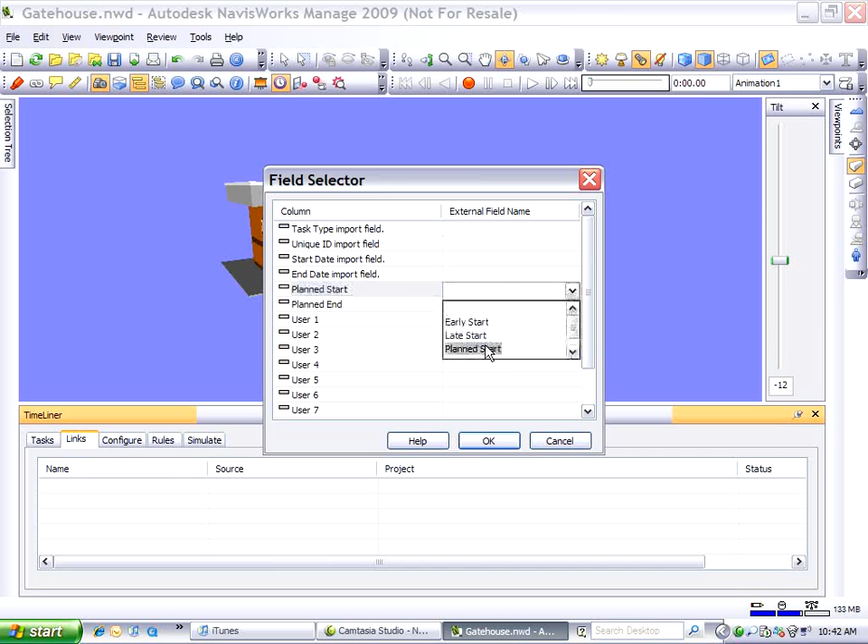Then I'm going to right-click on that particular link and tell it to build a task hierarchy from that link, using all the work I did in Microsoft Project to populate the tasks that need to be done in Navisworks.

Here I can see all of the items set up for me, what time they're going to start, what time they're supposed to end. I'm going to go through and attach all the 3D objects in Navisworks with my project now.

We can even control what color things are. So as I build this, or as the model builds, you're going to see things coming in as light green, meaning that they're in process. When they're done, they'll be a solid object.

So I'm mapping basically the layer names with the layer setup from Microsoft Project. As I scroll this across, I can see that I have items attached. We could physically go out and pick certain items and attach it to certain tasks. That is also an option.

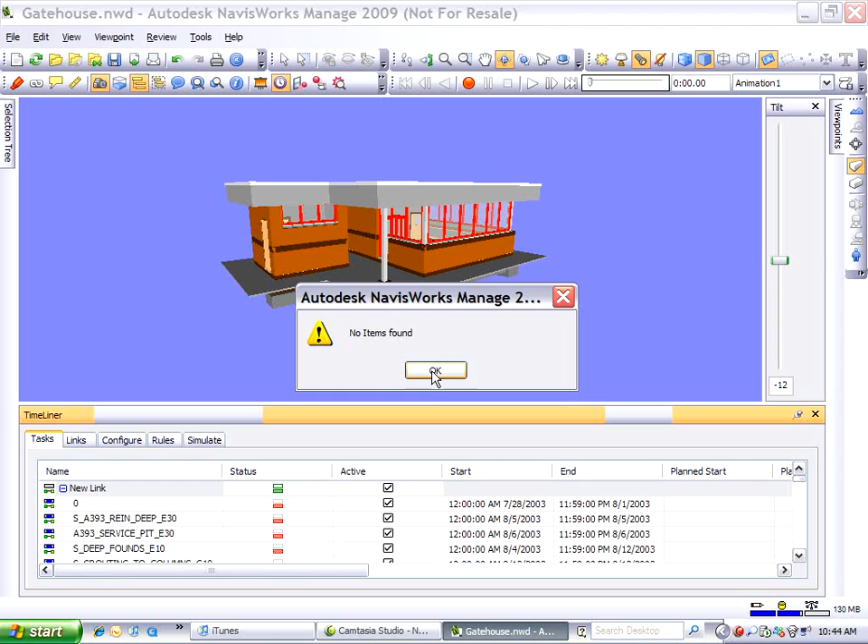So very easily, I went out and did a quick check here to make sure that all of the items in Navisworks match with something in Project, so nothing's left out in this construction process.

The next thing I'm going to do is select all of the tasks in the list and give it a task type. Note we have construction, demolish, and temporary. So at one time we're showing all the new construction, we can also show things that are being destructed, and they'll be removed from our list if need be.

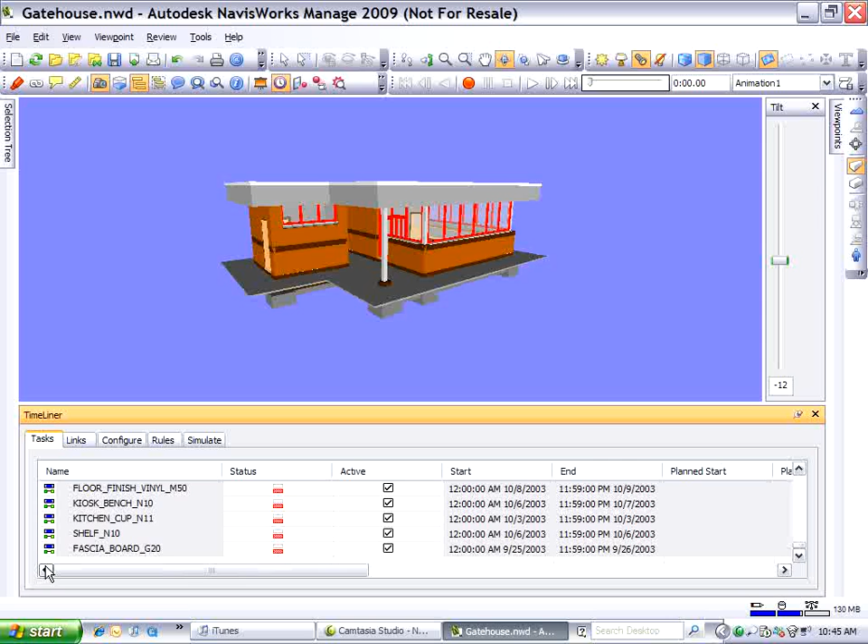Now I'm going to go ahead and simulate, and very similar to the animation we created earlier, I've got a timeliner at the very top showing me what time and day, how many days or weeks I've been working on this. I'm just going to hit play.

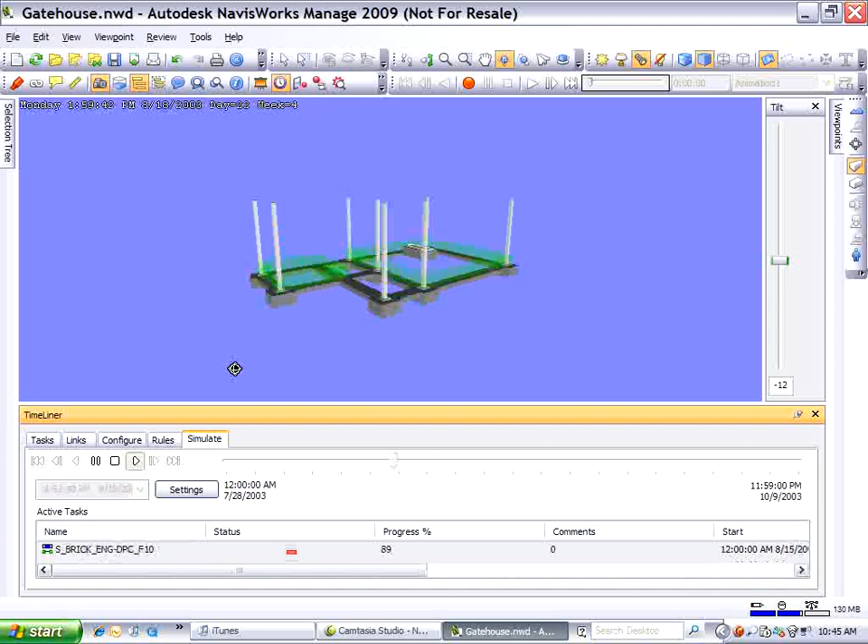Now you can see the process going on in this particular model, when things are going to be built, and by watching this you can see if something's going to be out of sync. So if we had mechanical or electrical, some of those items probably wouldn't be built before ceilings or roofs are installed.

You may have seen it right in this model itself: there was an out-of-place sequence where the rail or molding across the middle was being built before the wall was done. So we do have an out-of-place sequence in this particular model, something easily fixed just by a drag and drop scenario moving around.